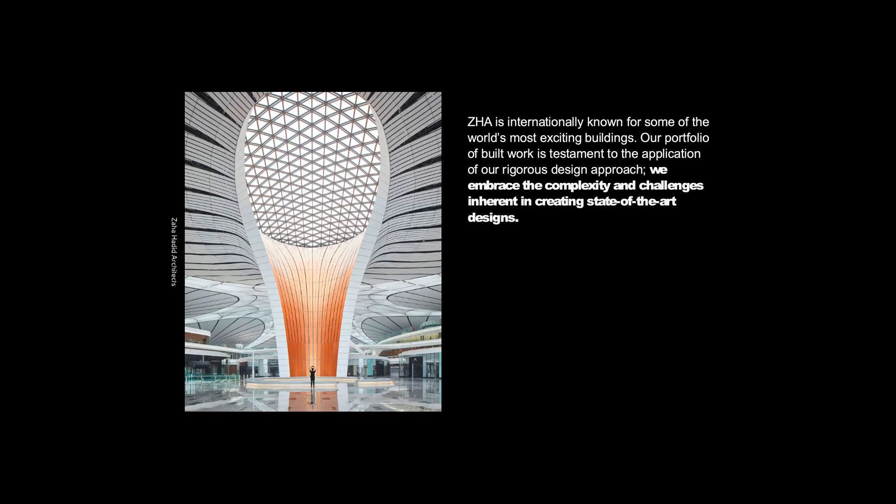We were talking about challenges earlier with the previous panels. We really find challenges what really drives us, so we embrace challenges. We are still at the forefront and still global leaders in research and design, and we diversified the way we work through the years to make sure that R&D component is always thriving.

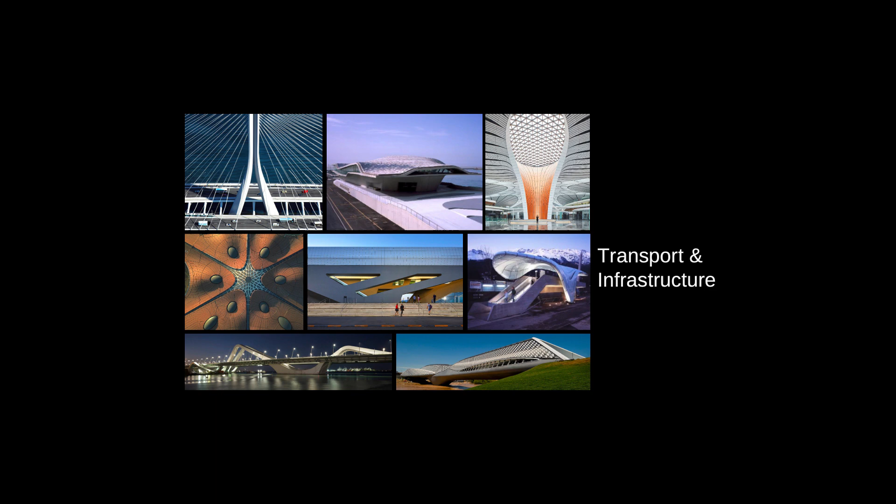Cultural projects were our bread and butter at the beginning, especially really focused and specialized on those from the very early onset, but then we worked a lot on large mixed-use office, corporate, and HQ headquarters, transport and infrastructure. Sometimes the audience isn't aware, but we work a lot on that too - bridges, train stations, airports. We designed Daxing Airport, which is the largest single terminal airport in the world, in Beijing. Also resi buildings, a lot of hospitality - we did work with Taj on a hotel, for instance.

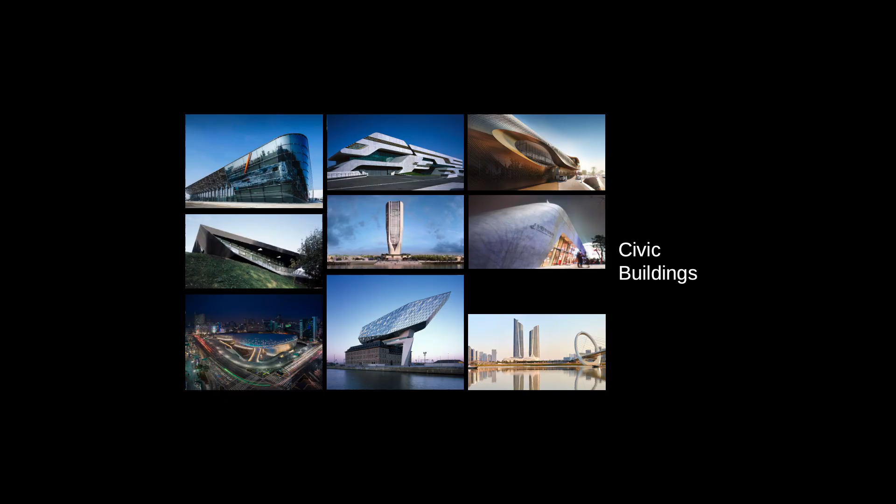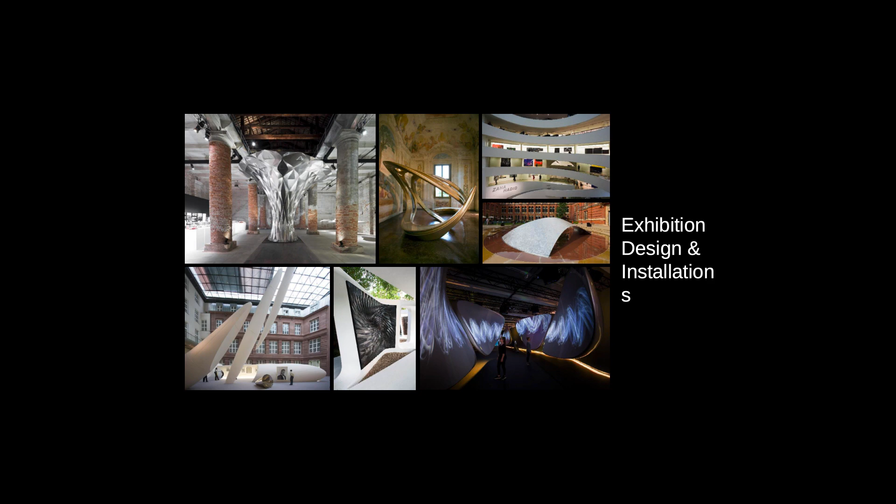What we really pride ourselves on is disseminating knowledge, and I don't mean only internally within our company, but also we really love working with contractors, exchanging ideas with contractors. I think we pride ourselves on having contributed, obviously with other practices as well, to growing certain markets, in particular China, for instance, where we've been working for 25 years.

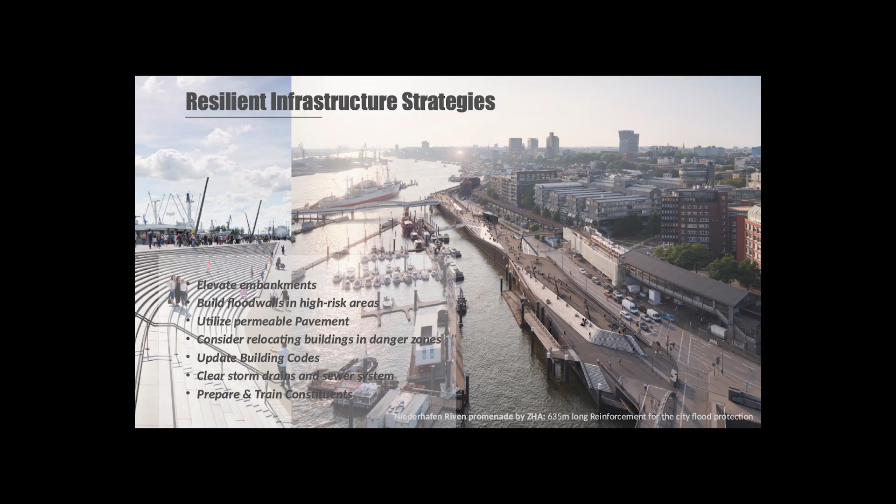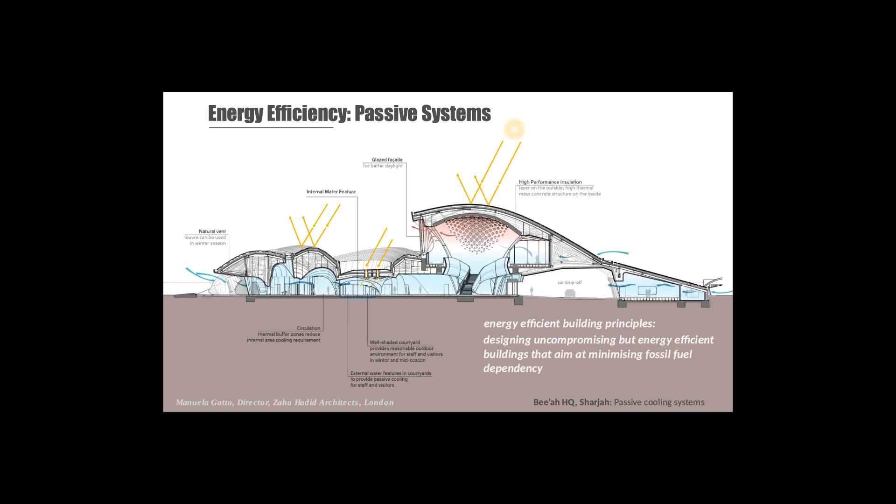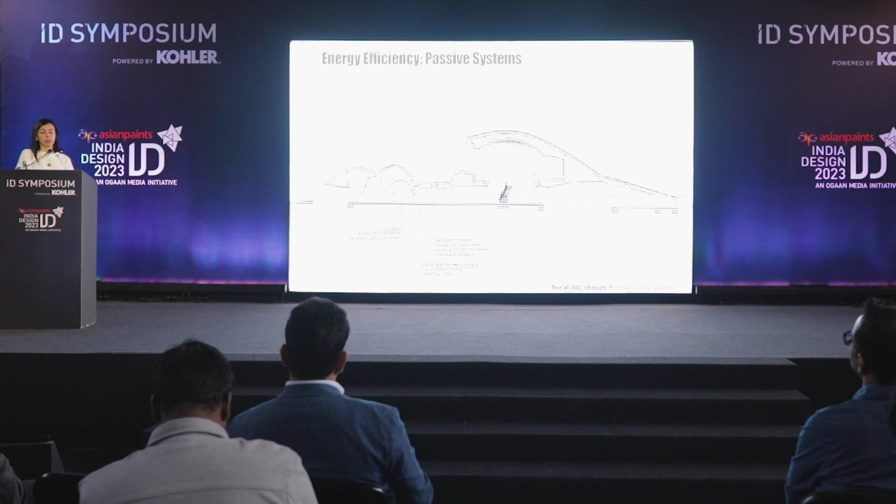For instance, we work a lot with this case and others, making sure that stormwater is managed, making sure you incorporate as much as possible permeable surfaces, and passive systems, of course. This one is a project we just opened at the end of last year in Sharjah in the UAE, and it's been completely designed to be a highly sustainable passive building. Every piece of glass is shaded - there's a lot of opaque surfaces, but still a very good natural light level inside, for instance.

Integrating renewables in the facades, solar panels integrated in facade and roofing, along with more specific systems incorporated in large buildings like the Daxing Airport, ground pump systems, water management, and throughout photovoltaic panels cladding.

We're not only talking about design in terms of economics and environmental factors, but also social. The social sustainability agenda for the UN, the target the UN has for 2030, is something we try to take on board as much as we can, alongside economics and environmental credentials for the building.

We do this by trying, as much as we can, to develop the project together with the client from the start, getting involved at the onset when the client is developing their brief. We always try to make sure they incorporate elements of public space, so that the project, whether private or public, gives back to the community as much as possible.

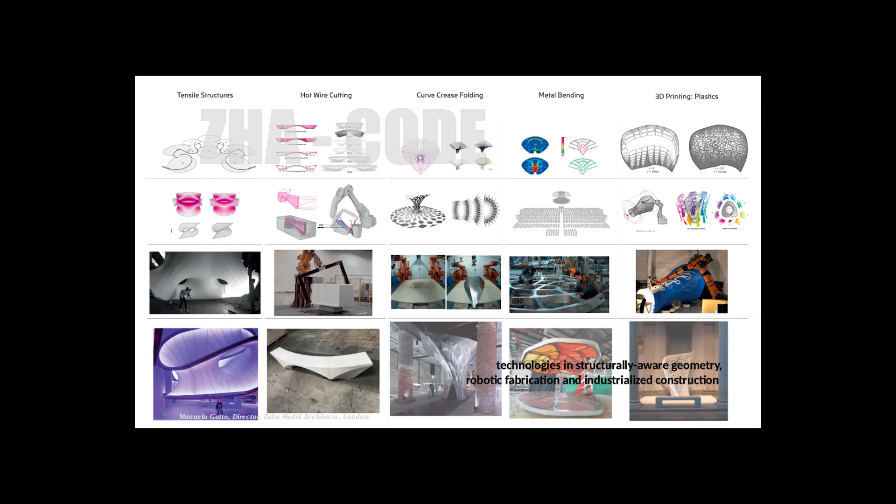Now I'll explain more about the support teams within the company that enable our design teams to do what they do. In particular, this one is called ZHA Code, a focus group within our company purely focused on R&D and creating tools for designers, developing structurally aware geometries, robotic fabrication, and industrialized construction.

This helps the design team not only design in a fabrication-conscious way, but also further down the line find the right contractor and the right way of fabricating, from small installations to large elements. Some of the techniques they use include tensile structures, hot wire cutting, curve crease folding, and self-standing structures that are structurally relevant because of their geometry and folds.

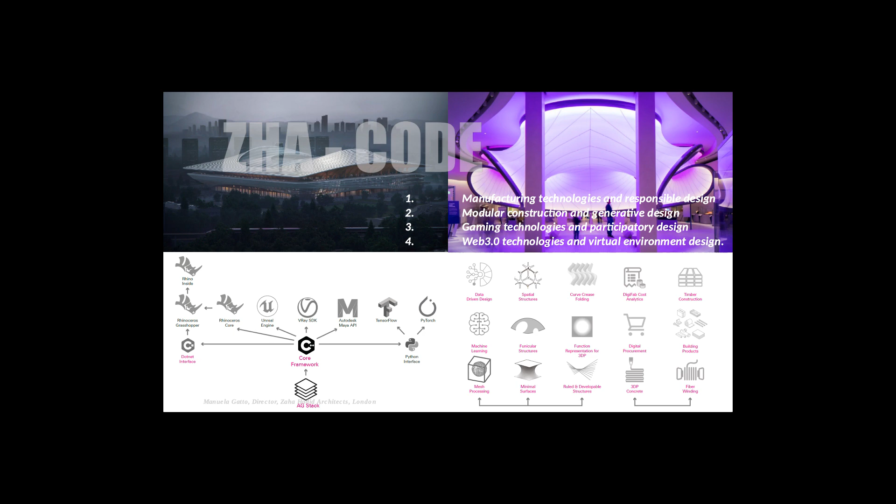All this is supported by a bespoke computational framework, incorporated seamlessly into the daily workflow of all our staff. The targets we've set ourselves with this group are those you see on the screen.

Developing manufacturing technologies and responsive design. Responsive design means responsive not only to the client's input, but also to the final user's input, and I'll show an example briefly.

Modular construction, which is very important for sustainability, so modularity and generative design, gaming technologies—I'll show an example of why gaming technologies are important—and participatory design, making sure there is as much audience participation as possible, whether from final users, final buyers, neighborhood associations, or other stakeholders within the project.

This process isn't confined to our company alone; we work closely with universities in a very non-formalized way. We didn't set up formal partnerships—rather, Zaha used to teach at various universities, including Harvard and the Architectural Association in London, and many of us come from there.

I studied at the AA in London, the Architectural Association, so there was a seamless discourse between university and practice, since Zaha taught there, as did Patrick Schumacher, our principal, and many of us have taught and studied there. So there's communication between our company and the universities, both giving knowledge and receiving it back through students.

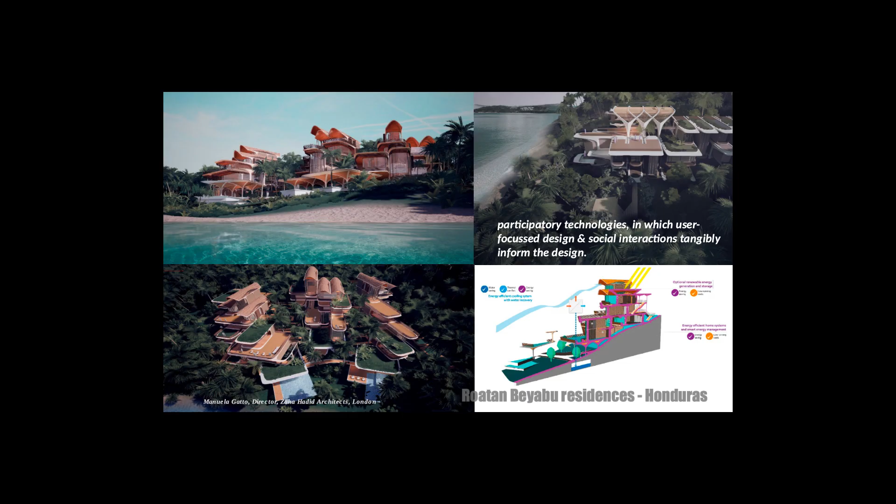This slide focuses on responsive environments and housing, something we've worked on with the AA for 20 years now, not only academically but also within certain company projects. For example, I'll show a project we did in Honduras, where together with former students working on their thesis, we developed this.

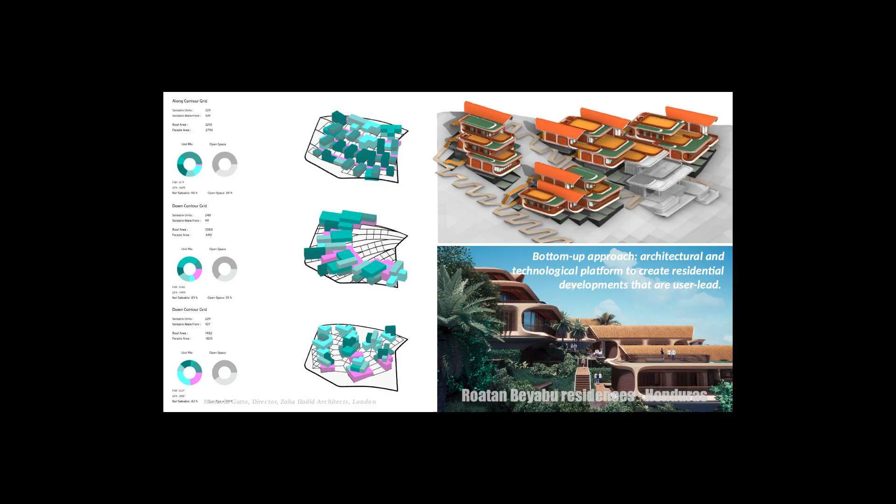We developed a participatory design approach in which technology is used to foster user-focused design—a bottom-up approach. We want to create tools for end users or buyers of these houses to customize from the beginning, but within parameters, including the client's budget expectations and environmental parameters to ensure the project hits the correct certification.

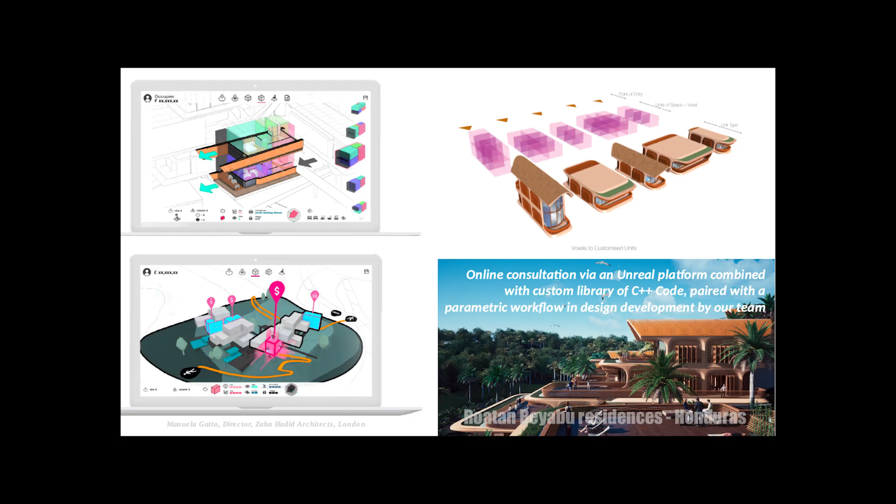This is a platform for online consultation. We used Unreal, a gaming software, combined with custom C++ scripts developed within our company, enabling end users to contribute to the design by making choices—which elements to combine, how big the house needs to be, where the bedroom or the module hosting it should go, views, orientation, and so on.

This is translated seamlessly within the work of our practice, because we use the same sort of responsive and parametric tools. At the same time as the user is making their choices, we can update our work because we work parametrically.

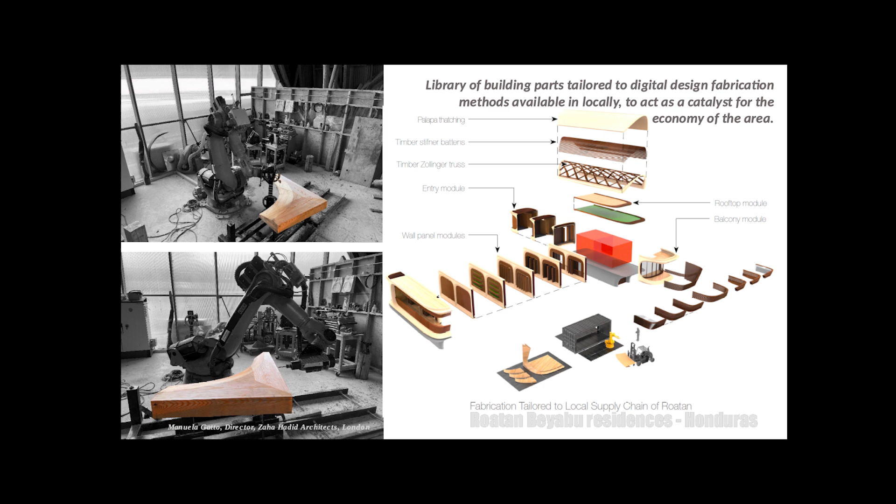This shows the library of building parts, these components that are available for the public. We're always working with local materials. In this case, for instance, mostly timber because of the location. In Honduras, it's in the middle of a forest.

We're using local timbers, but not only local materials, but local fabricators and local contractors. We never, ever - I'm not aware of any project we've done where we impose the client to use a contractor from abroad or European contractors. We always use local ones.

We do quite a lot of research, helping the client find the right contractor, but also we do a lot of work with contractors' technical teams, to make sure that they are using a workflow which is compatible to ours and vice versa, so we can really contribute throughout the process until the fabrication is completed.

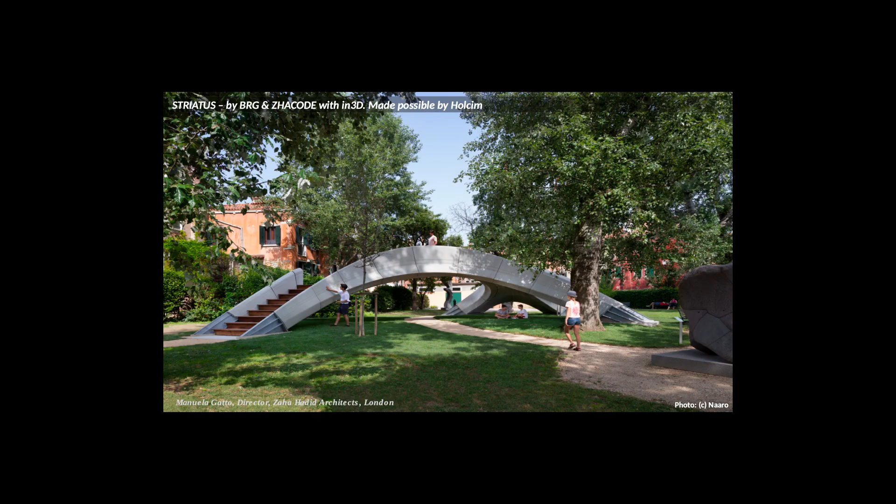Of course, modularity is not only modularity in terms of housing and big kind of elements and components, but also smaller components. For instance, this one is a prefabricated bridge that we designed and built for one of the biennales a few biennales ago in Venice, and it's entirely concrete printed.

Of course, the advantages of 3D concrete printing is that there is a level of reduction of redundancy, but also you can basically be modular without being a cookie cutter. You can have modularity, but modularity doesn't mean to be self-similar.

For instance, when you build using molds, the key element is that all molds need to be the same, so that you cut down costs, but then every element you're producing will be the same. In this case, when you work in 3D printing, this is no longer relevant. The modularity is there, but every module can be different, and that doesn't really add to the cost.

And of course, you can still work, like in this case, with concrete, but it could be recycled concrete, so you can contribute to the reduction of overall embedded carbon footprint of the project this way.

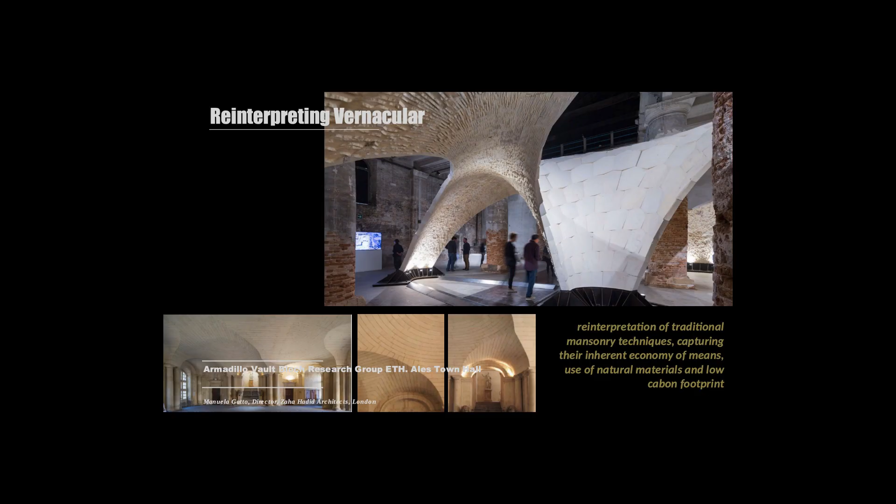But another thing we would like to do is work a lot with vernacular. We love looking at ancient techniques and understanding how we can use them again, stretching them maybe to the limit and upgrading them with current capabilities in terms of fabrication.

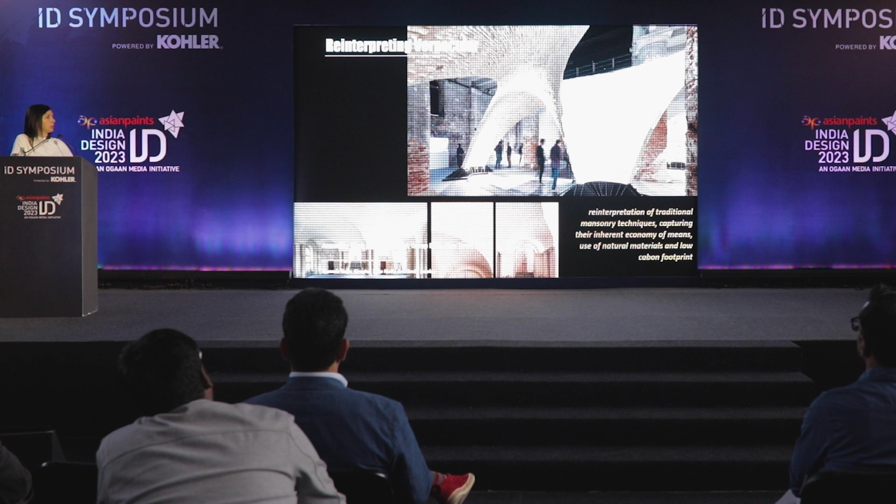This one is a project, for instance, that we did with the ETH Institute, with the Philippe Block group in Zurich. Again, it's for Venice Biennale, and it's a vault which is constructed using the exact same technique that you would see in European Baroque vaults.

So really the vault stands purely by virtue of its own geometry. There is no mortar and there's no reinforcement, nothing. It's really constructed as you would imagine these vaults being constructed in the 16th century.

This one is another one. Here the geometry is slightly different, so this one requires a minimum of reinforcement, same system, and all the stone block there you see is 3D printed.

But then if you want to scale this up, the choice of material really determines what you can do in terms of innovation, but also in terms of reduction of carbon footprint, also in typologies like, for instance, in this case, Stadia, that are known to be accountable for 80% of the carbon footprint of their own industry.

This has improved lately, but until a few years ago, that was the case for Stadia. So acting in Stadia and reducing the carbon footprint of Stadia largely reduces the carbon footprint of the entire football industry. In this case, of course, this is not a huge stadium.

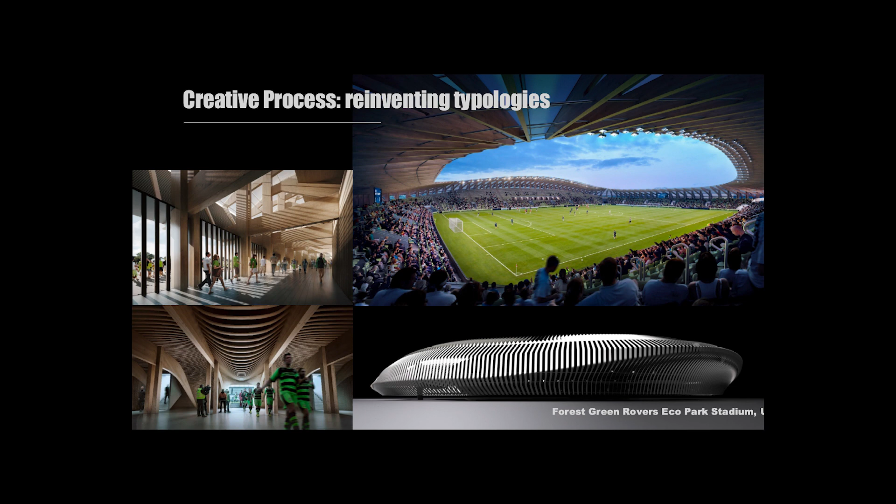It's a 10,000 spectator stadium, but it's entirely designed and built in timber in order to be sustainable at the source, but also fully recyclable.

Another way that we have of using AI, artificial intelligence, is to try to help us in terms of analytics, whether it's laying out the furniture in the optimal way in a headquarter, or whether it's designing cities. We use these tools as a prop.

There is a lot of talking about AI lately, and there's a lot of talking about AI being able to sort of take over the job of a designer. I don't think we're designing by AI. We're not inputting and getting the final result from an artificial intelligence engine by any means, but we do use it as a support, and I will try to show how.

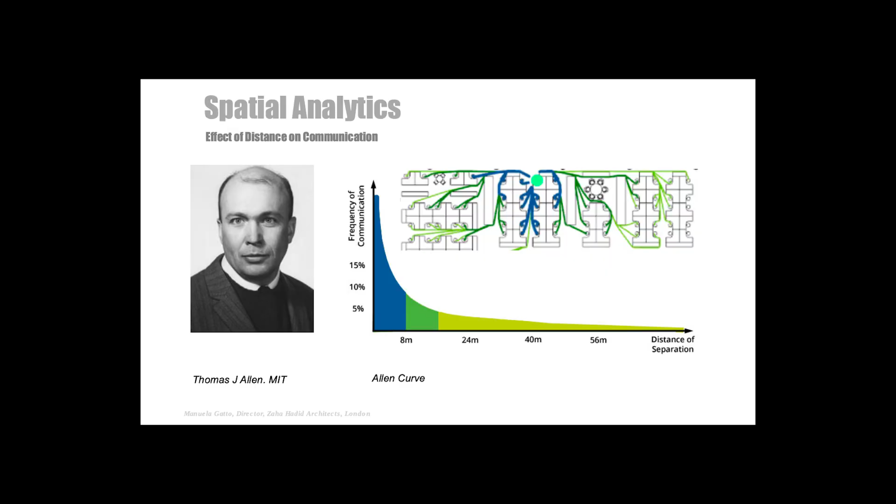We use it a lot in spatial analytics, for instance headquarters. This is the Allen curve, and what it says is that the frequency of communication is much greater with closeness. Quite logical, but it's been scientifically measured and mapped.

Even pulling furniture apart, we tested that in the same amount of square meters, if you pull desks apart, you get 70% more interaction. This is a tool we're using to measure distance.

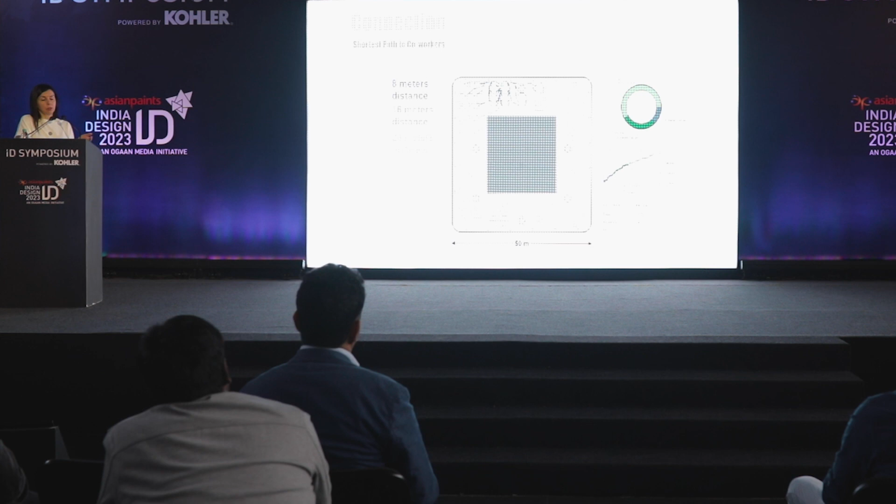So it's a simulated desk layout within one of our floor plates, and then we run these tests to see which areas are the most interesting in terms of communication, and where you could potentially allocate a team that has much more of a need to work with others, versus which areas are less suited.

In this case, it's quite clear that the corners, which are normally dedicated to top managers, are nearly devoid of communication. That's good if the top manager doesn't want to work with their own team, but obviously very bad in terms of interaction. So a company where top management is very involved with their teams' work should reconsider this.

We're measuring how many people are in reach of meeting tables, for instance. But what our clients find very interesting, especially for headquarters, is that we first start mapping the client's ID. Who is the client? Who are their teams? How do they work together, whether in isolation, how big they are, with which other teams they interact. We then use this information to understand which is the best location for each team in the floor plate.

So the team that has more need for networking will be placed in the area that is more accessible. But visibility is a very good parameter as well, because it's not only about physical distance between people, but also who I can see. If I'm working on a large floor plate like this one, it's a proven fact that if I see people, I will remember that I need to do something with them, and I will interact more. If I don't see people, the interaction will be much less.

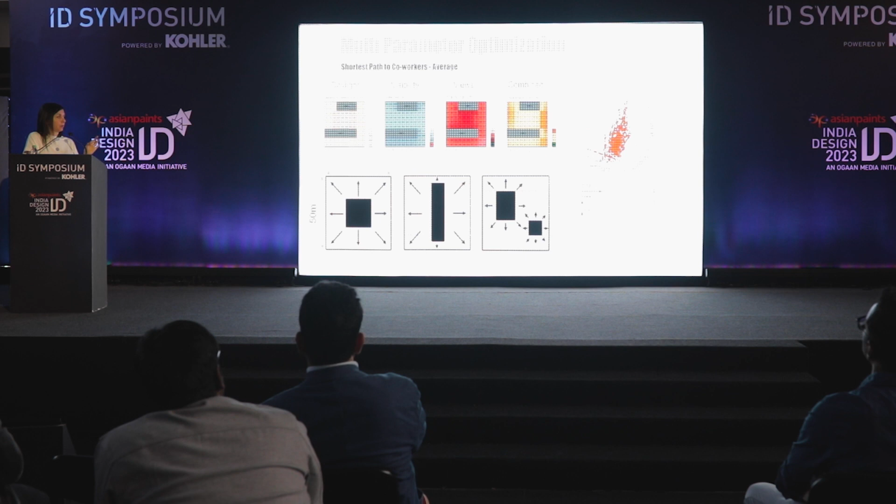You'll see the position of the core, and then mapped on the box diagram or the cube diagram. At the end of it, we can identify the best layout for these parameters, and then start working with it.

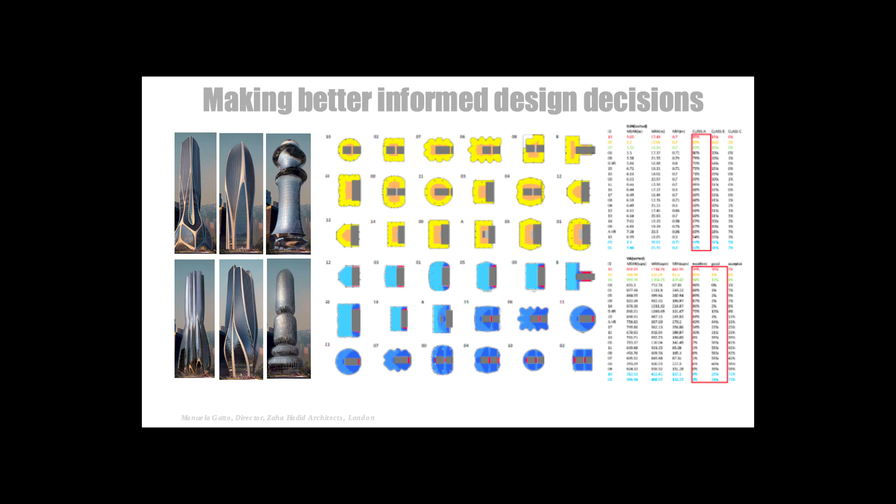We're not really starting off with AI and letting AI determine our floor plate. When we design towers, for instance, we start off with the concept, which is driven by completely different parameters, shown here in the images. It's driven by what the client wants, the client budget, what we expect the site to look like once the design is done, and how it contributes to its surroundings. Then at the same time, we discuss and try to find the optimal floor plate. So it's a give and take between these two.

This is a headquarters we designed in Guangzhou, China. Here this shows how we run the same type of AI tool to identify the best position for the atria.

Of course, the floor plate was going to be very deep, so we needed atria. We tried to position them exactly to contribute to daylight, for instance. And then how you locate the cores, again, to try to optimize daylight and optimize interaction.

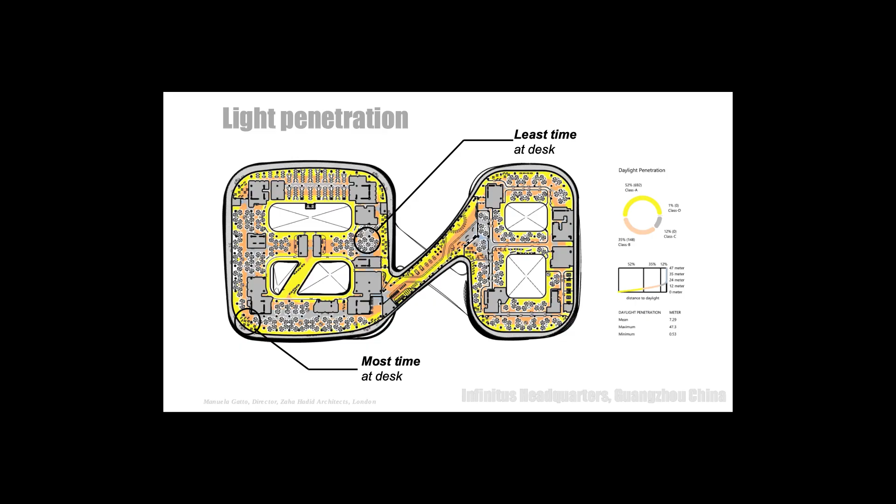We identify where to position areas that have longer occupancy during the day, so they need more daylight, and which areas you can locate elements that are not so needy in terms of daylight, meaning temporarily used formal meeting tables and so on. Least visibility areas we work with more focus work, like smaller meeting rooms or locations for those that need to work more quietly. Most visibility we normally dedicate for informal meeting areas, collaborative work, or even breakout areas where people can enjoy spare time and have a chat, but also do informal work.

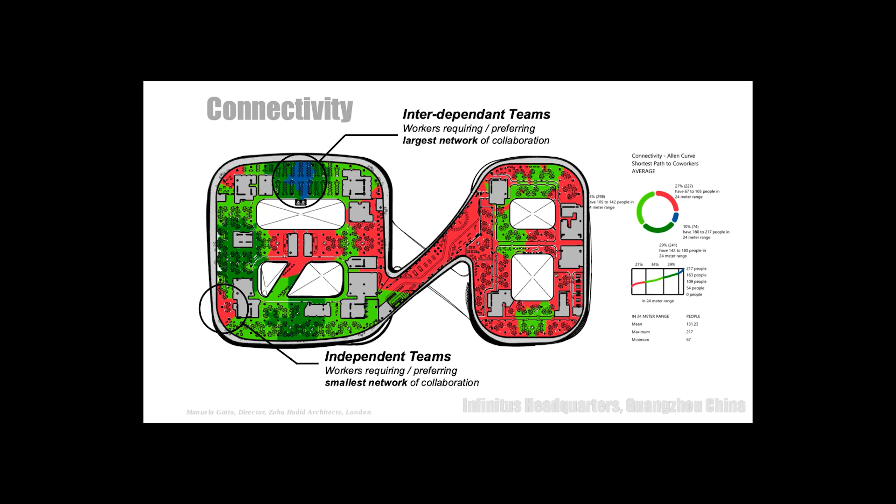Location of teams: interdependent teams where interaction is higher, and independent teams where interaction is lower. Once you have this behavior plotted onto the floor plate, you can really design furniture configurations that suit the use - whether it's focus groups, group work, informal meeting, or breakout area - and locate them in a way that suits.

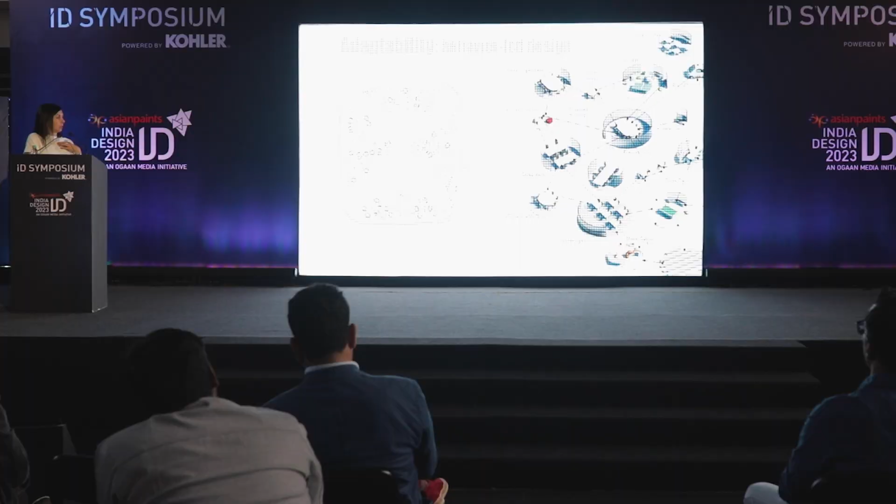This is miles away from 70s or 60s Bürolandschaft where you have this kind of big carpet of desks and everybody complaining about noise.

This is a master plan we designed in Chengdu, and we're building it at the moment in Chengdu, China. We started with the master plan all the way down to designing the buildings and construction drawings. The design team had this idea that because the master plan had only a few towers and a lot of low-rise office buildings, so large floor plates, they had this idea of elliptical distribution.

They did curves and how the curves would allow for a wavy circulation across the site. So they had the idea of the ellipses, but then we used AI to determine the best possible configuration and grouping of ellipses, to try and find the best combination that will give us the best daylight. This is an example of what the AI came up with in terms of mapping, trying to focus on the best outcome at the top of the graph.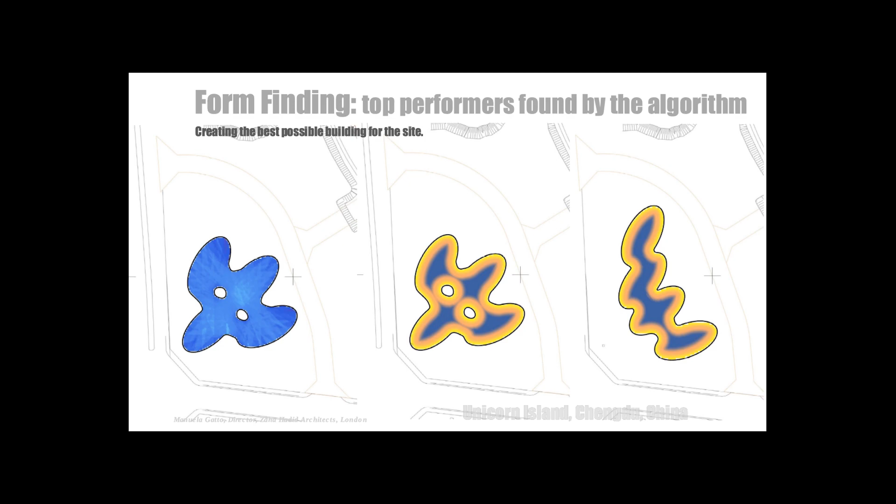We picked those shapes and started working on them as architects. AI came up with this and then we developed them further and really made them into something that works.

We also used the game, this time not for form finding or clustering of buildings, but for circulation on site. We developed an artificial intelligence driven game that we let our staff use. Our staff would use this game and the AI engine would learn from the staff use, instinctively directing themselves left or right, and at any crossroad or fork, the AI engine would learn which areas or triggers lead people to turn in one direction or the other.

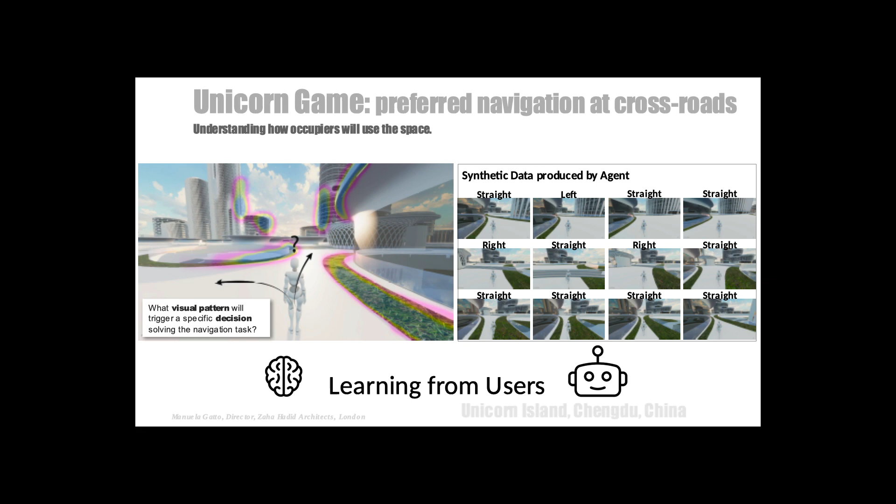This mapped the element, and we started understanding how people navigate space and what leads them from A to B - without any sense of program, what would encourage them design-wise or visually to go from one place to the next. We found that in most cases, people were attracted by low-level buildings close up and then higher rises in the distance, so having this long-distance target would attract them to go in that direction.

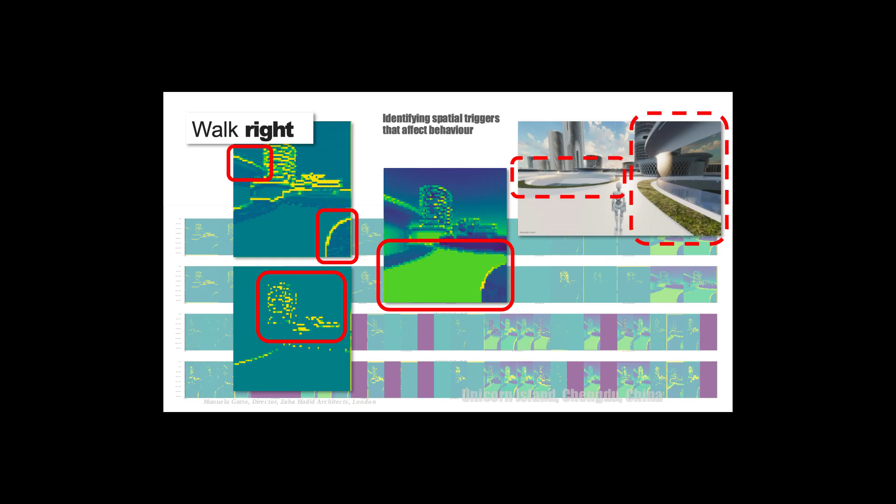So this is the master plan now being completed. You can see it being built on the north side.

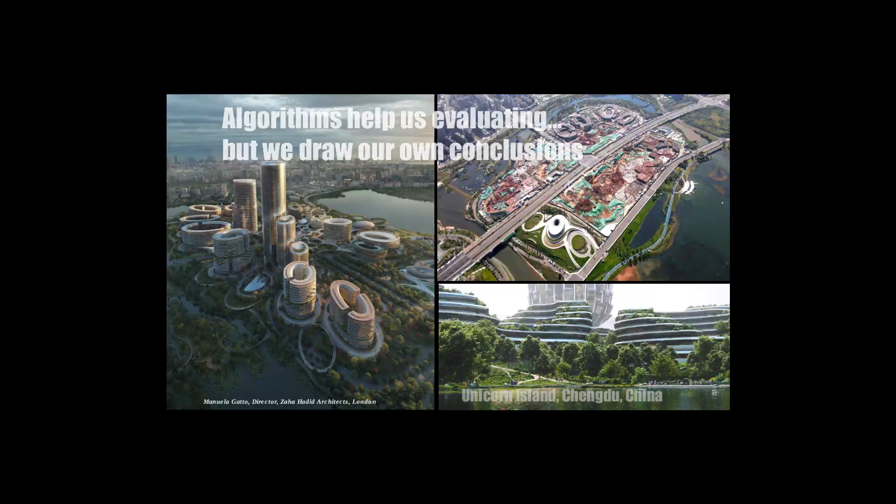I just wanted to conclude saying that yes, algorithms definitely help us in evaluating and analyzing, finding best practices, but finally, obviously, we as every other architect will draw our own conclusions and make the best of this outcome. We'll never let AI drive the design, so to speak. Thank you.